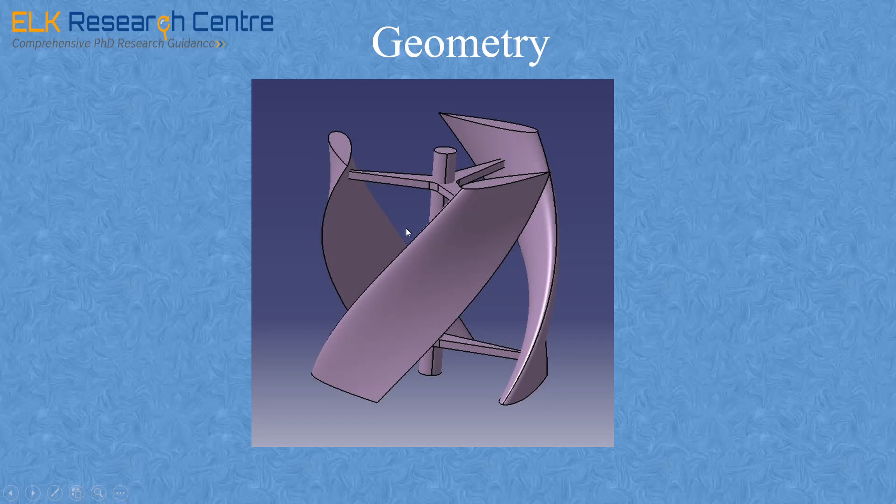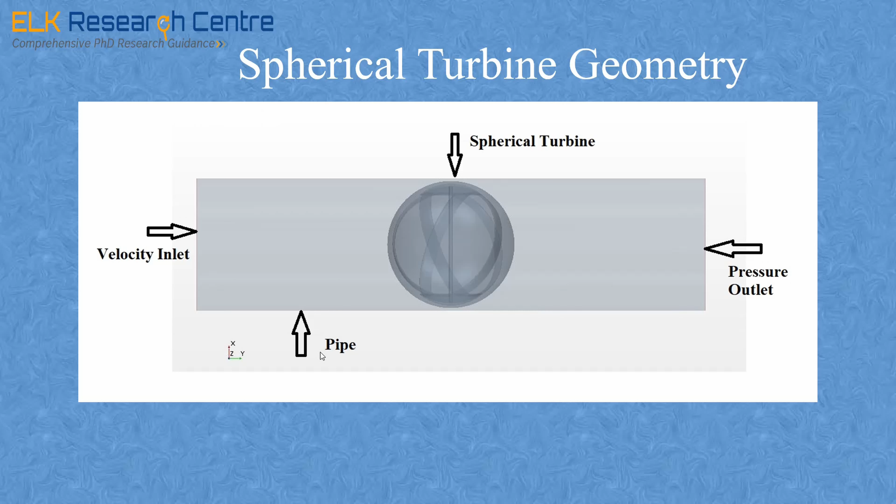Spherical turbine geometry. This is velocity inlet, pressure outlet, spherical turbine and pipe. This is for spherical turbine inside the pipe domain. Here we discuss boundary conditions of the geometry. Once the geometry process is completed, next move on to the meshing.

The mesh consists of the basic three-dimensional elements such as tetrahedron, hexahedron, quadrilateral pyramid and triangular prism. Hexahedral element has the highest accuracy of solutions for the same number of cells on a given geometry. Various other basic elements have a minimal amount of accuracy compared to the hexahedral, which is the reason why other basic three-dimensional elements are less considered in the meshing process.

Other basic three-dimensional elements are also considered as degenerates of the hexahedral element, where the edges of the considered hexahedron are reduced to zero to form other basic three-dimensional elements. Hence, the meshing is concentrated as hexahedrons for the entire geometry. Hexahedral mesh was used to discretize the fluid domain.

For the same cell count, hexahedral meshes will give more accurate solutions, especially if the grid lines are aligned with the flow. The mesh density should be high enough to capture all relevant flow features. The mesh adjacent to the wall should be fine enough to resolve the boundary layer flow. In boundary layers, quad, hex, and prism/wedge cells are preferred over tris, tets, or pyramids. Three measures of quality: skewness, smoothness, and aspect ratio.

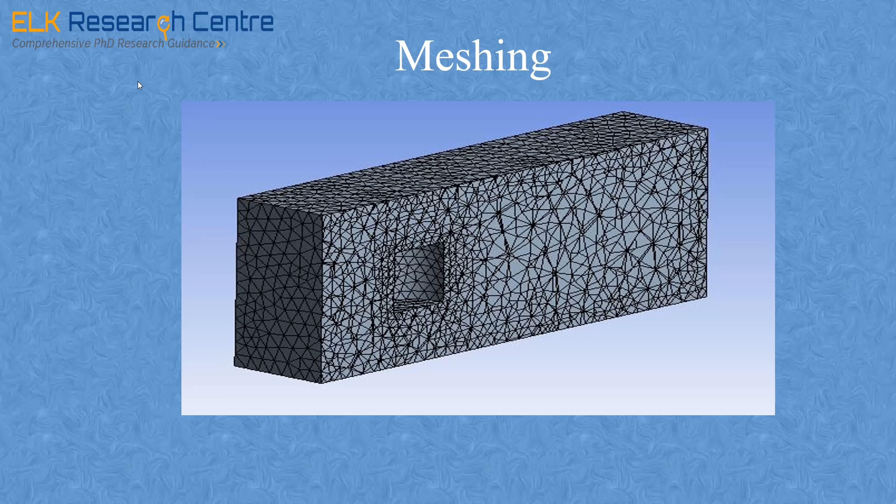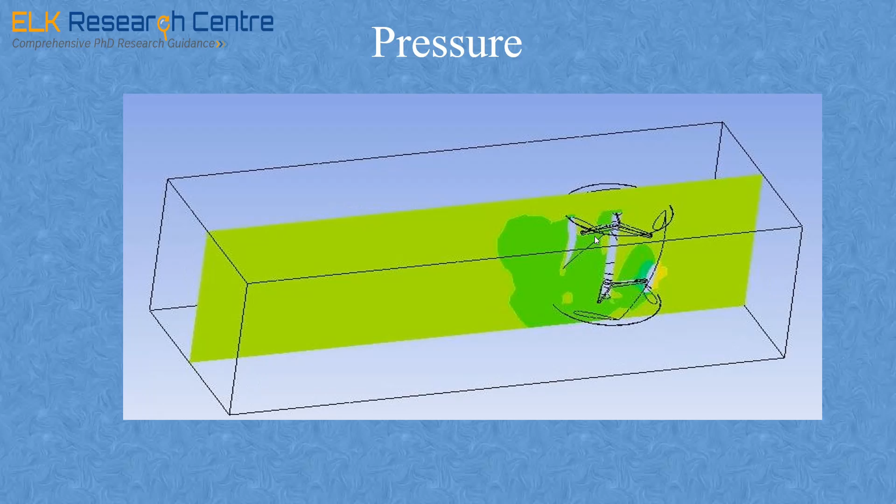Pressure profile. Blade pressure profile. This simulation can be extended to find the turbine performance by changing the blade profile as well as the helix angle at different free stream velocities. The present study is simulated for a 3-blade turbine. Further, a correlation is developed for prediction of reduction in torque and power coefficient for the turbine with solidity ratio.